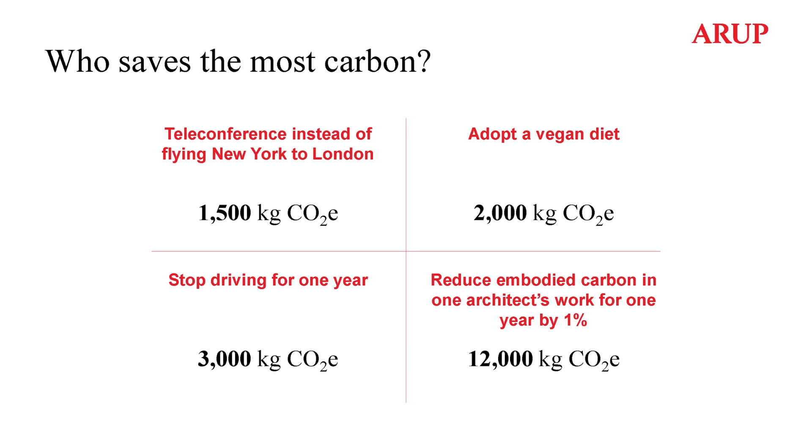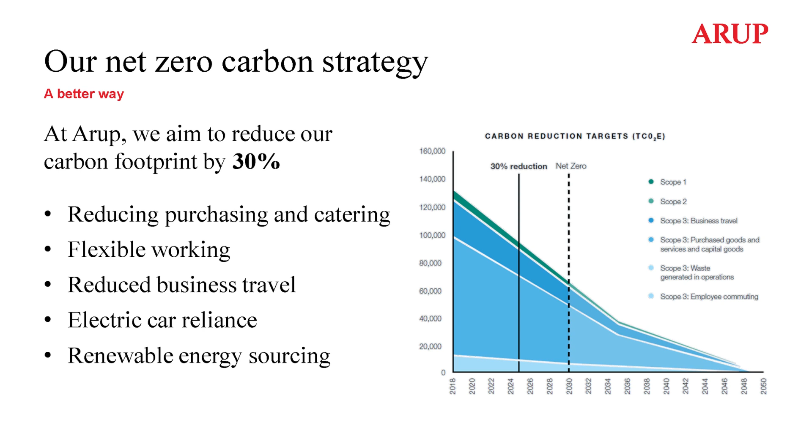So at Arup, we decided we needed to go along with the Paris Climate Agreement and the Architecture 2030 Challenge, and that we would take a number of steps to reduce our own company's carbon footprint. We would reduce our purchasing, our catering. We made a commitment back in 2018 that we would reduce our transportation emissions by 20% by creating a flexible workspace where people could work from home one day a week. I'm happy to say now that we've exceeded that. All of these work together to help us reduce our company's carbon emission.

But we also realized that compared to the carbon that goes into the buildings and structures we produce, our own offices only account for a very small portion of that. So our reach is really a matter of our influence on our clients, of how we can help them reduce the carbon footprint, the global warming potential of their own projects. And so that's really what I want to focus on.

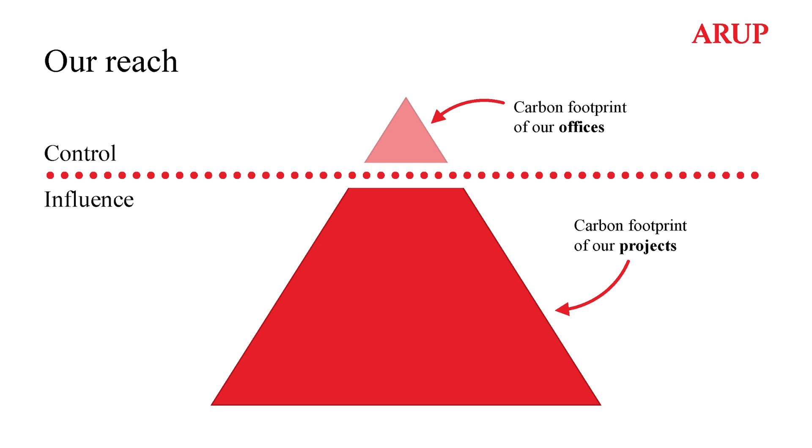To help us, we created this tool we call Zero. Externally, we call it Arup Zero to avoid confusion with other companies' own projects like Coke Zero. But the idea is that we create a couple of databases. We curate data on the carbon intensity of different items. We take in weather data so we can look at building energy performance and so on. And we also collect data from our past projects, which helps us create benchmarks. This is something we're now working on extending to all of the projects we work on, so that every building we get involved with, we will do a life cycle carbon assessment for.

So I want to illustrate what that means, what is the carbon footprint of a building. Let's say we're planning a building now. It's going to be constructed in 2025, expected lifespan of 100 years. There's a certain amount of carbon equivalent, measured here in tons of carbon dioxide equivalent, that goes into the construction, the mining of materials, transportation to the site, erection on the site, and so on. That's the embodied carbon of the building.

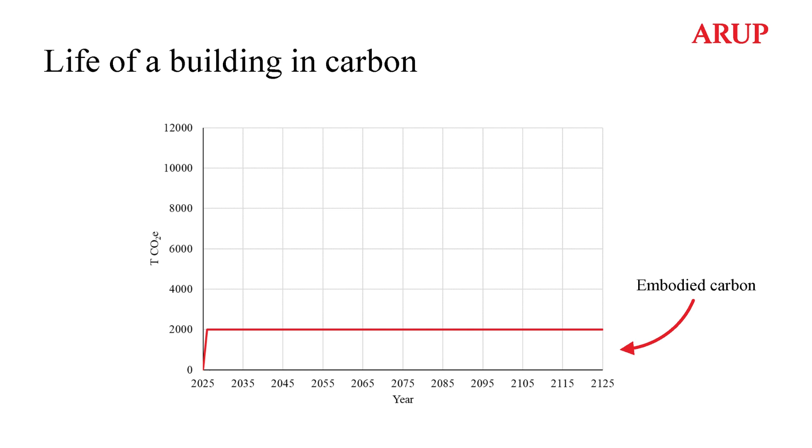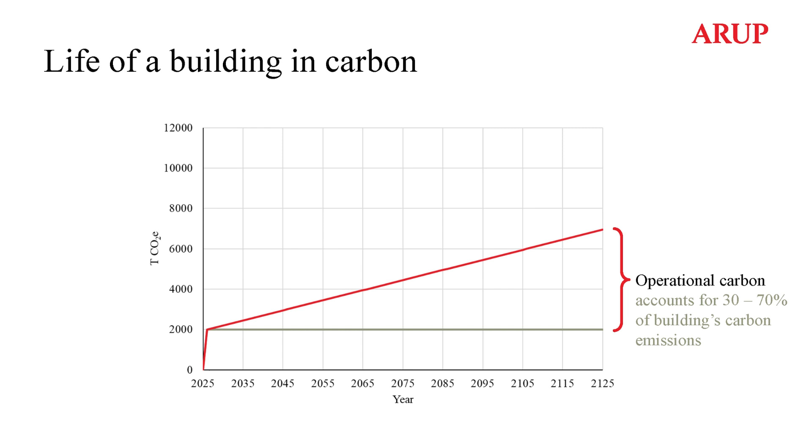In addition to that, there is the operational carbon, the amount of energy we're using in the day-to-day operations of that building throughout its lifetime. That accounts for about half of the total carbon footprint of the building. And if that's about half, then there must be something missing here, and what's missing are retrofits. So let's say every 20 years we're going to go in and rip a bunch of things out and put some other things in. Each of those is going to have additional carbon emissions associated with the extraction of material, landfilling of material, and production of the new material that's going to take its place.

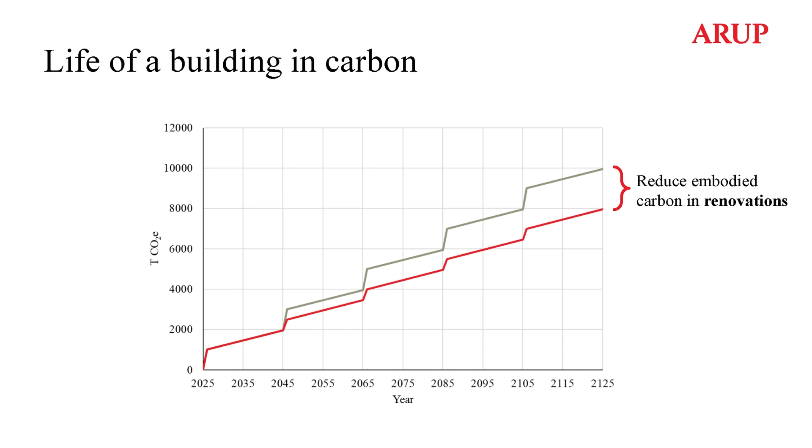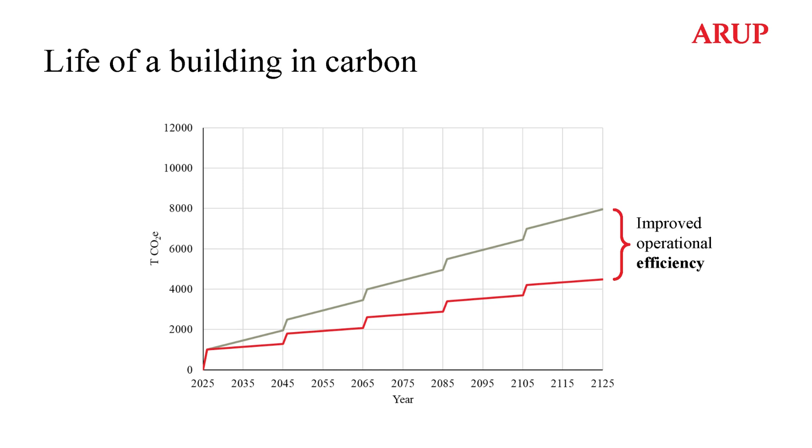So now we have the building's carbon footprint, and we want to find a pathway to zero, a way to reduce that so it goes back down to the x-axis. Our first step is to ask, can we reduce the carbon footprint of construction, the amount of embodied carbon, and bring the whole thing down? Then we'll also try to reduce the embodied carbon in each of the retrofits, and finally find more efficient systems to put in the building. Each of these helps bring that down. What's left, we want to handle through renewables and carbon offsets in order to reach net zero. So we have a zero carbon building.

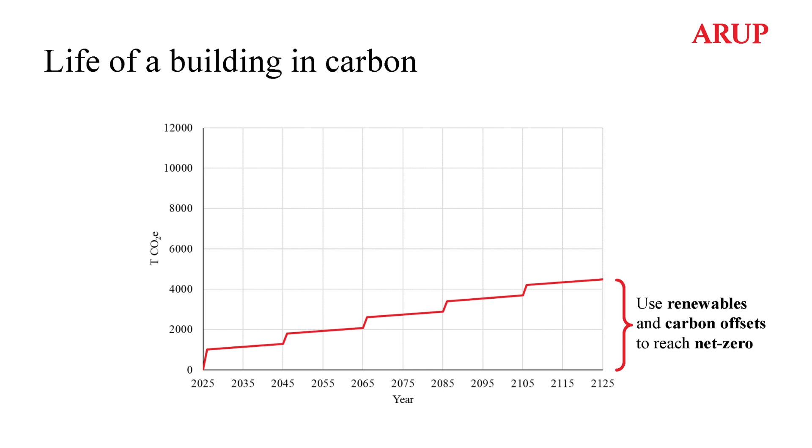This is a hypothetical building. Lighting would take up about 1% of the total, but the shape of the curve for lighting would be similar to the shape of the curve for the entire building. So what can we do to create circular lighting? What can we do to create net zero lighting? The first thing, I call the zeroth principle, because it's before we even start thinking about electric light: how can we bring in daylight? If we can bring in useful, effective daylight, we can reduce the need for consuming energy for electric lighting in the first place. That helps us lower our carbon footprint altogether.

Once we've identified what lighting we need, we come to four other principles. First, a circle of lighting materials—making sure we're using products that can be upcycled or downcycled at end of use, or as a last resort recycled, used in some other way outside their lifetime as a lighting product. Trying to use adaptable systems that can be changed to meet future needs, that can integrate with other parts, even potentially parts that haven't been invented yet. And providing flexibility—the ability to take the same lighting products and use them for multiple purposes, to take a room from a day look to an evening look and so on.

And finally, high quality design. Why do we worry about high quality design? Because if we can create lighting that people like, then they're not going to be in such a hurry to replace it.

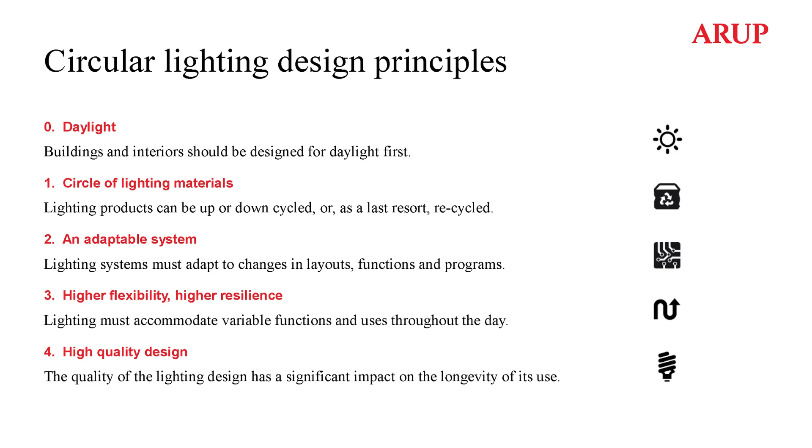So we had a few rules of thumb for how to create this carbon effective lighting. The first thing is transition to LEDs. Why LEDs? This graphic comes from a Department of Energy study comparing the resource footprint across several axes between incandescent lights, compact fluorescent lights, and a few generations of LED lighting. Incandescent lights are represented by the blue outer ring, the highest footprint, and the others are shown relative to that. The point was to show that as LEDs improve, their total impact on our resources becomes much less than the impact of these other lighting technologies.

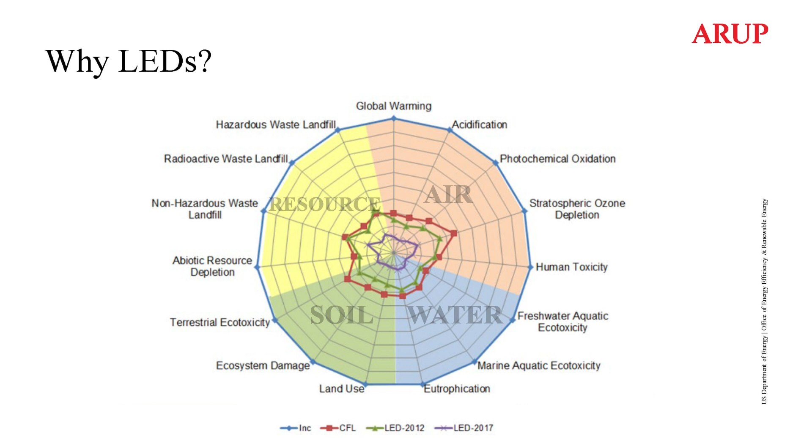So we have gone to using all LED lighting in all of our projects. The next question is, how do you select a fixture? One thing to point out: if you're working with linear fixtures, you have fewer fixtures, less packaging, less transport—you reduce the carbon footprint from the beginning. So we tend to prefer the linear fixture model as opposed to a bunch of spot fixtures.

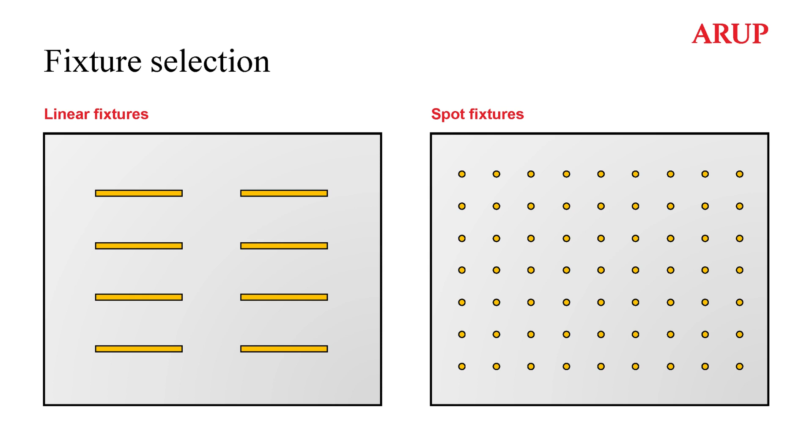Then, where do we source it from? For a project in Boston, am I bringing in my lighting, shipping it from somewhere nearby, in Montreal maybe? Is it coming across the continent from Seattle, or am I using overseas shipping from China? Depending on how far it's coming, that's also going to contribute to the carbon footprint.

Alexandra mentioned that question of the EPD. So do we have an EPD? We use a form similar to the graphic Alexandra showed, where we can record what information we're getting from the EPD, and whether we have each piece of information. There's an X if we know it; if not, it says module not declared - we don't know. Right now we're working off industry averages, trying to guess the carbon footprint, but we're building out that database to get more accurate pictures of the actual carbon footprint of each product we're putting into the building.

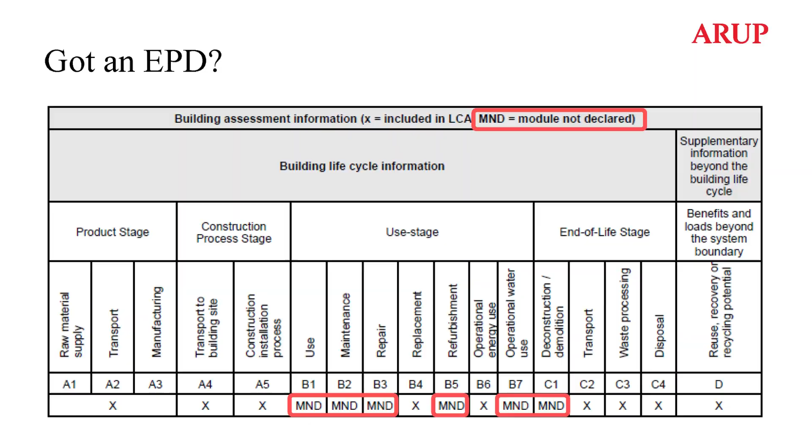So here's an example: this is the Amorepacific headquarters, located in Korea I believe. It's a project we're highlighting as a use case of low carbon footprint lighting.

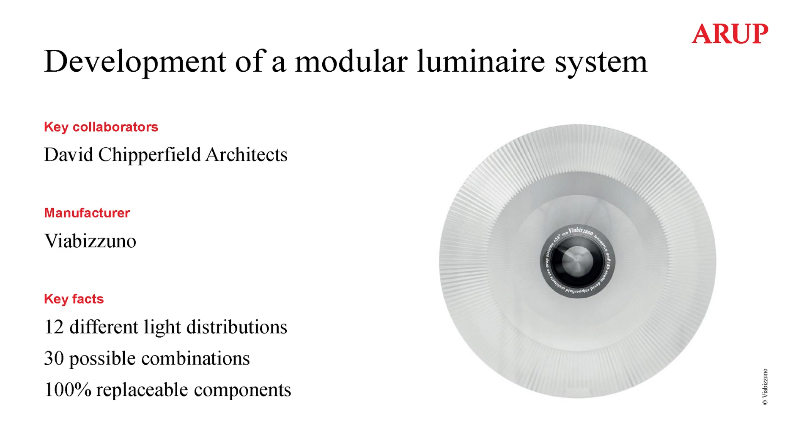So what did we do? First, we developed our own luminaire system for this building, actually produced by Viabizzuno. It's a modular fixture with a few different lighting distributions and combinations of elements that can go into it, and all the components are replaceable. There's a glamour shot of it - you can see one optic element, and then a different optic element giving a different lighting distribution.

But to show that it meets our core principles of circular lighting, even before we thought about the electric lighting, we were doing daylight analysis of the space. It's designed architecturally to allow daylight to penetrate through a number of garden courtyards, so you have daylight both on the perimeter and on the inside.

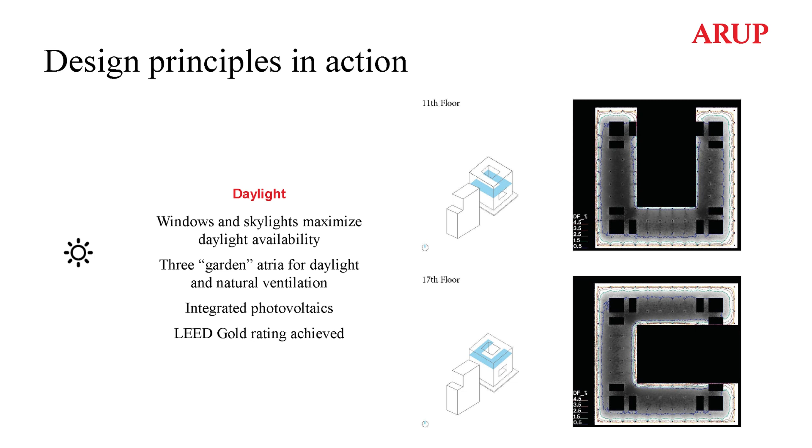Then, just thinking about how to design a fixture, we were looking at reducing material quantities. You saw in those pictures that it has a very narrow profile - the housing is actually quite small, the lens sticks out beyond it. We could reduce the amount of material that went into it and the amount of packaging we needed.

It's an adaptable system where we can swap out the parts from different fixtures. It's easy to replace parts because they're all disassemblable. And it offers flexibility in that we can adapt those lenses and the looks of the scenes it creates to multiple different uses. Those atmospheres, as we call them, contribute to a high-quality lighting design - a design that people want to keep with them.

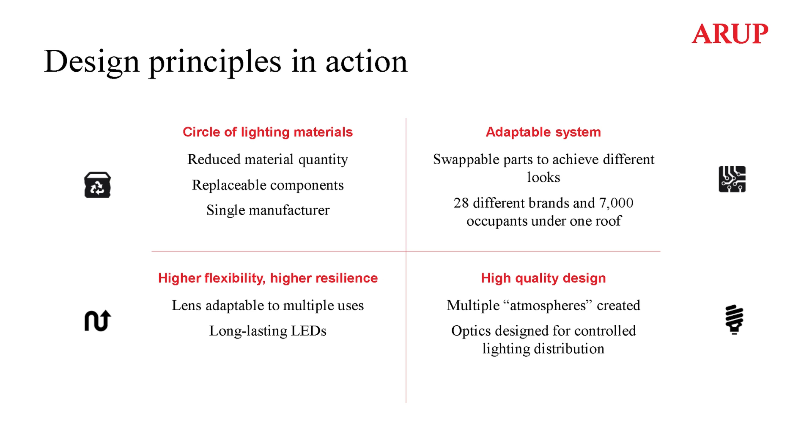So I want to wrap up by saying, how do we push this forward? How do we use these principles in more and more projects? One thing we've looked at doing internally, and we're interested in working with DLC to put into broader use, is this idea of tools to find the right light for each situation. We call this Luminaire Broker.

I'd think of it like a dating website for lighting designers and manufacturers. You go in and say what it is you want - so many lumens, such and such wattage, this form factor - and get back information on different fixtures out there that you might consider. One thing we can do now is limit ourselves to manufacturers who have provided an EPD, or at least to fixtures manufactured within a certain radius of our project, so that we control some elements of the carbon footprint from the outset.

We believe that by making this part of our decision-making process, we can move the industry and encourage manufacturers to know that providing an EPD makes their products more desirable to us and to the end user.